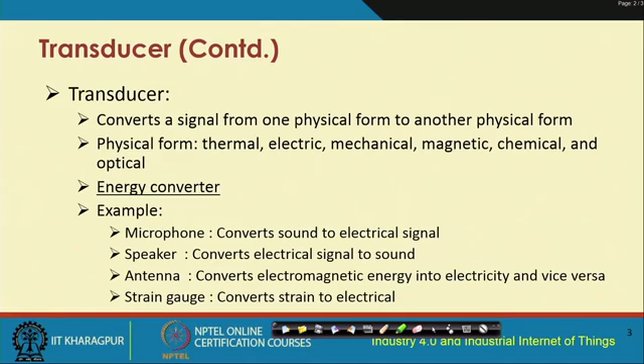For instance, things like the microphone, the traditional microphone. The microphone converts sound signals to electrical signals, which are then amplified further, and through the speakers we are able to hear. So this is the concept of how a microphone works. Microphone is an example, a traditional example, of a transducer.

A speaker is also likewise a converter of energy from electrical form to sound. So a speaker is also another example of the transducer. Similarly, we have antennas which convert electromagnetic energy into electrical energy and vice versa. So antenna is also a transducer, and there are many other examples such as a strain gauge, which is also an example of a transducer.

So let us try to understand sensors as transducers. What is that sensor? Sensor, as this name suggests, senses something. Senses the physical quantity, the physical changes, the physical characteristic of the environment in which it is operating. So a temperature sensor, for example, will sense the changes in the temperature of the environment in which it has been deployed. So this is an example.

It is basically the characteristic of a device or material to detect the presence of a particular physical quantity, and in this example, this physical quantity is temperature. So the changes, to detect the presence, the change in the temperature is what a temperature sensor would do.

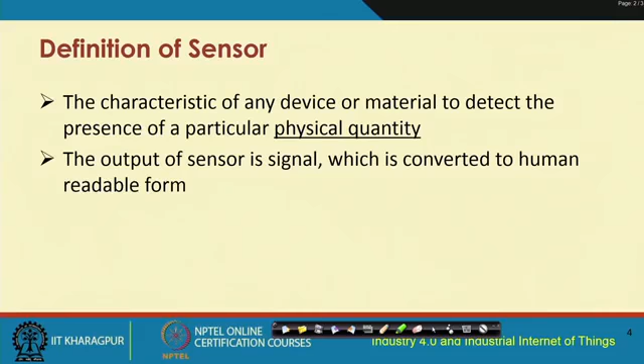So a sensor basically performs the function of input by sensing or feeling the physical changes in the characteristic of a system in response to some stimulus. These stimulus are basically physical parameters, which could be changes in the temperature, changes in the lighting condition, changes in the gas.

A gas sensor, for instance, would sense changes in different gases for which they have been fabricated to sense. So for example, there could be a methane sensor, a carbon dioxide sensor, carbon monoxide sensor, oxygen sensor. These are basically sensors devised to sense the changes in the amounts of these gases in the environment. Gas sensors are very useful to monitor different gases, particularly in our current context of environment monitoring.

Gas sensors are very useful, and they are also very useful for mining environments. For example, methane sensors are used in mines to detect the increase in methane gas in coal mines, and as you know these gases are very dangerous, so it is very important. So IoT in mines, for example, you need to use different gas sensors if it is for a gas monitoring application. So these sensors are very much useful.

Temperature, pressure means atmospheric pressure, atmospheric temperature, or it could be temperature of any particular object. So all these different sensors could be used for this particular purpose.

So then we have that something is sensed and the response is in the form of some changes in the resistive capacities, changes in the capacitive capacities, or changes in current voltage characteristics. So all these characteristics - current, voltage, resistance, capacitance, impedance - come in the form of the output.

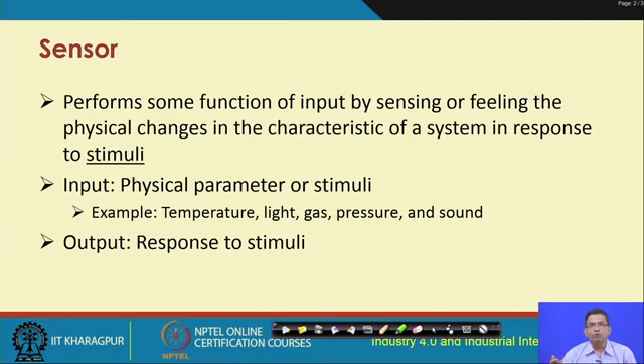Now let me see if I can show you some of these different sensors. So this is a PIR sensor.

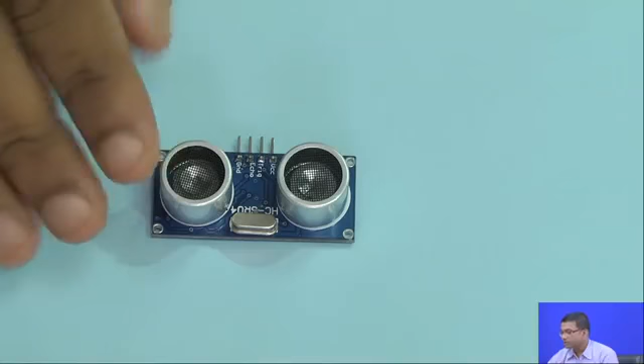And we have this ultrasonic sensor. This ultrasonic sensor can help you detect how far a particular object is, so obstacles can be detected with the help of this sensor. This basically works on the basis of ultrasound, a sound wave sent from one of these two cylinders that you can see over here. One cylinder sends a sound signal, it gets reflected by the obstacle and is detected by the other, and then based on that the sensor works out how far a particular obstacle is, whether there is an obstacle in its range and so on.

Let me show you another sensor of a different type. This is basically the color sensor. It can detect colors, different types of colors.

This is an accelerometer sensor. Then we have the gas sensor, carbon monoxide more specifically. This sensor can detect carbon monoxide gas. Then I have also brought for you another sensor which is the rain gauge, the rainfall sensor, which will detect rainfall.

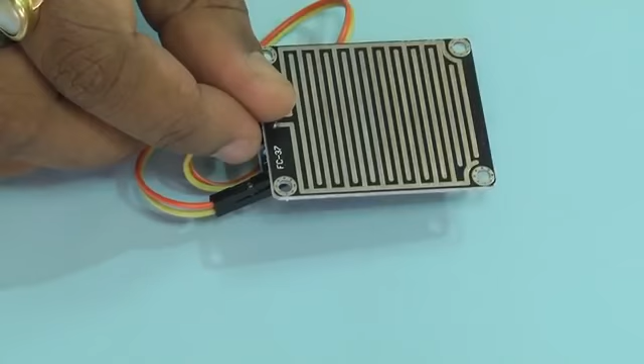So we have different sensors. Now let us go back to our discussion. We have these different types of sensors, and these sensors have their own different ways of operating. But let us try to understand first the characteristics of sensors at a very high level. In general, the characteristics of sensors can be classified into two types: the static characteristics and the dynamic characteristics.

Before that, let me tell you how a particular sensor works. Different sensors have different operating mechanisms, but in general, after a sensor starts its operation, it takes a while, in many cases, to come to something called the steady state. So it will come to a steady state of operation and then it will work in that steady state.

Static characteristics are basically about the characteristics of a particular sensor in the steady state condition. Once the sensor has come to its steady state, how the output of a sensor changes in response to the input change is captured by static characteristics. Dynamic characteristics are about the properties of the system's transient response to an input, before basically the sensor achieves the steady state.

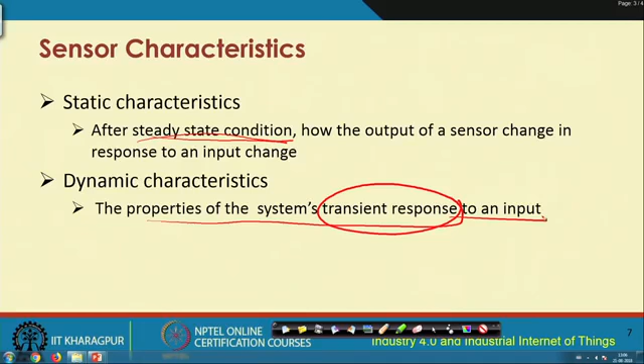These static characteristics could include accuracy, which is about the correctness of the output compared to a superior system, how accurately the sensor measures whatever it is supposed to sense. Then we have another static characteristic, the range, meaning the range of operation, lowest value to highest value. For instance, lowest temperature to highest temperature of a particular temperature sensor is the range of that sensor.

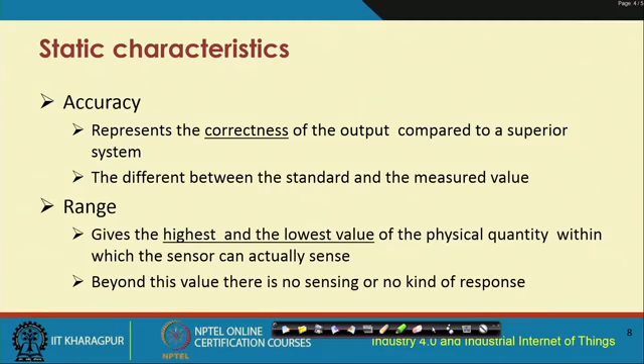Then we have resolution, which is about the smallest change in the input that a sensor is capable of sensing, similar to the resolution of a camera. For a temperature sensor, the smallest change in temperature that it is able to sense or detect is basically the resolution of that sensor.

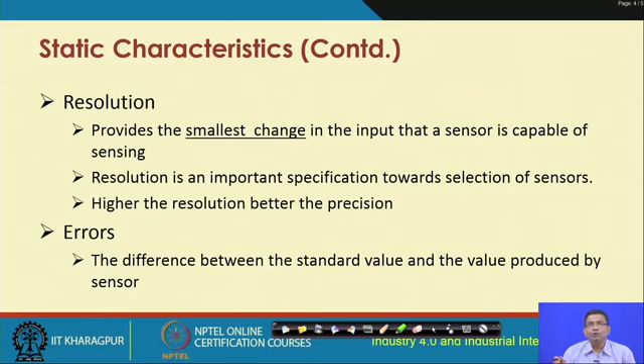Error is basically the difference between the standard value and the value produced by the sensor; that is the error characteristic. Sensitivity indicates the ratio of incremental change in the response of the system with respect to the incremental change in the input parameter. That is basically the sensitivity of a sensor.

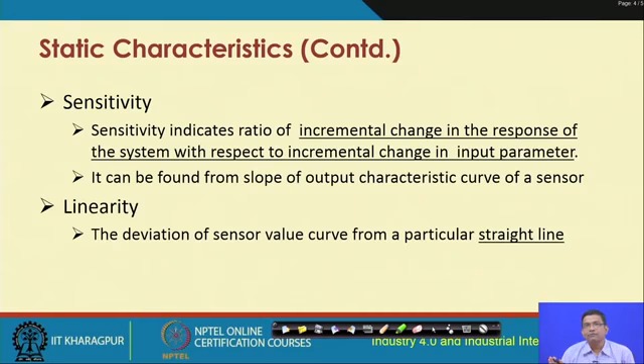Then the linearity characteristic is about the deviation a sensor has in its value from the straight line curve. If you draw the curve of behavior of a particular sensor, the deviation it has from the straight line is the linearity characteristic of that sensor.

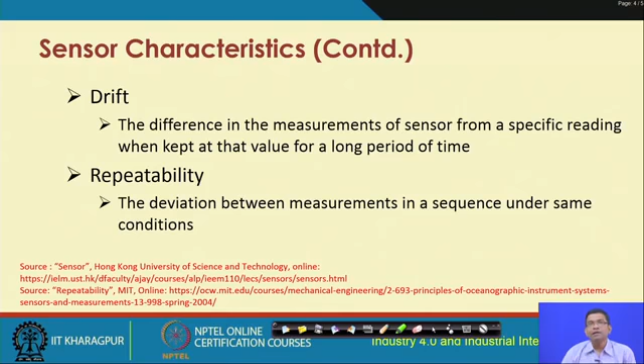Then you have the characteristic like drift. Drift is about keeping a particular sensor for a long duration of time in a particular condition, whether it's a temperature sensor or any other, and the difference in measurements that it shows over that period of time is the drift. Then we have repeatability, which is the deviation from measurements in a sequence under the same conditions, whether the same value can be repeatedly obtained under the same conditions by the same sensor.

Now, those were the static characteristics. Let us come to the dynamic characteristics. Dynamic characteristics are about, if you are changing the inputs, how well the sensor responds to those changes in input. So the transients that are received are captured through the dynamic characteristics.

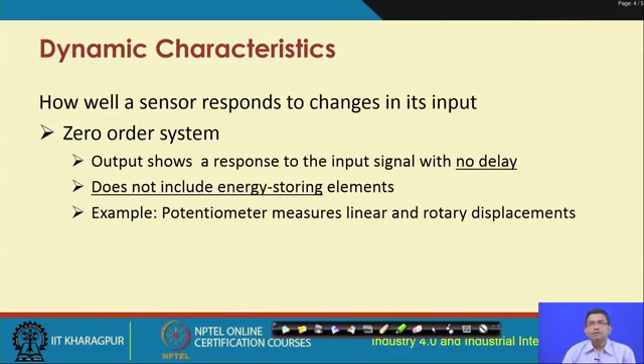You have different things like the zero order system, which is basically a system where the output shows a response to the input signal with no delay. These zero order systems do not include energy storing elements. For instance, a potentiometer, which measures linear and rotary displacements, is an example of a zero order system.

First order systems are when the output approaches its final value gradually. Gradually is very key to this first order system. These systems will have some kind of mechanism for both energy storage and dissipation.

Typically there could be a capacitance, for example a capacitor, which will store this energy and dissipate it over a duration of time in these systems.

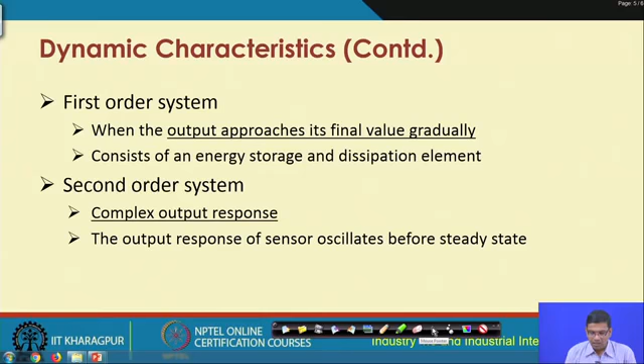Second order systems will have a complex output response, not gradual, and this output response of these sensors will typically oscillate before reaching the steady state. It will be something like this, oscillating between certain values before that steady state is arrived at. These are the second order systems.

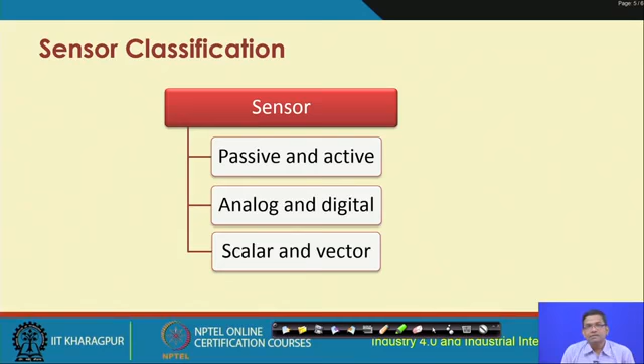Now let us look at how these sensors could be classified. The sensors could be classified in different ways: as either passive sensor or active sensor, analog sensor or digital sensor, scalar sensor or vector sensor. Let us look at what these are.

A passive sensor cannot independently sense the input. Examples of passive sensors are accelerometer, soil moisture, water level, temperature sensor, and so on. Active sensors are the ones which can independently sense the input. For instance, radar as a sensor is an example of an active sensor, along with sounder, altimeter sensors, and so on.

Let us look at another classification, analog versus digital. Analog sensors, as the name suggests, produce output which is some continuous function of the input parameter. Examples would be temperature sensor, light dependent resistor (LDR), analog pressure sensors, analog Hall effect or magnetic sensors, and so on. An LDR shows continuous variation in its resistance as a function of the intensity of light falling on it.

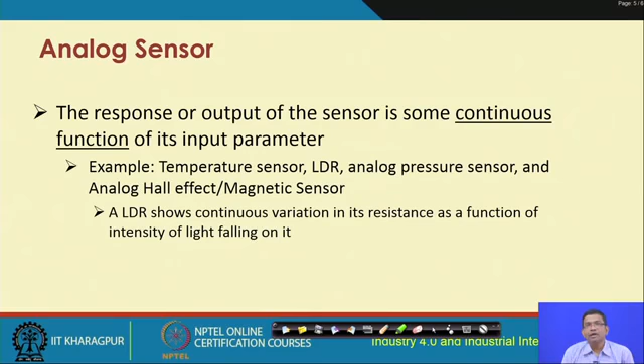Digital sensors are basically the ones where the response is of binary nature, and these have been designed to overcome some of the limitations of analog sensors, which produce a continuous function of the output with respect to the input change characteristics. There is some analog to digital conversion in most of these digital sensors. Examples of digital sensors would be PIR sensor, digital temperature sensor, and so on.

Scalar sensors and vector sensors. Scalar sensors are basically the ones which measure only the magnitude of the input parameter, only the magnitude. It is essentially the difference between scalar values and vector values that shows the difference between scalar sensors and vector sensors. So the response of a sensor is a function of the magnitude of the input parameter only, nothing else, and it is not affected by the direction of the input parameter.

Examples would be temperature sensor, gas sensor, strain sensor, color sensor, smoke sensor. These are all examples of scalar sensors, because the detection of these parameters does not depend on the change in the direction of the input, change in direction of temperature, change in direction of gas, etc. It does not get affected by that, but by the quantity of temperature, quantity of gas present, and so on.

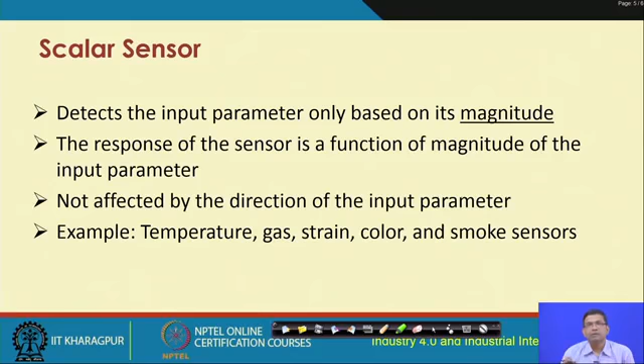Then we have vector sensors, where the response of the sensor depends on the magnitude, the direction, and the orientation, not only the magnitude but also the direction and orientation. Examples would be accelerometer, gyroscope, magnetic field sensors, motion detector sensors, and so on.

Let us look at how an actuator basically works. As you can see in this figure, an actuator takes two inputs: one is the energy, so there has to be some kind of energy supply or source, and some signal. Together these are taken by the actuator to produce some kind of motion, such as force or whatever. So an actuator is a part of the system that deals with the control action required, the mechanical action. This could be mechanical or electromechanical, so we could have mechanical actuators or electromechanical actuators and so on.

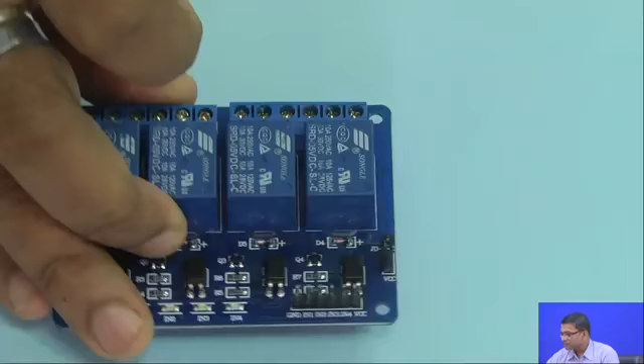Let me now show you some pictures of actuators that I have in my lab. There are many others, but these are some of these pictures of actuators. So this is an actuator.

This is an electric relay. What this relay does is transform electrical energy into some kind of mechanical action, so it could be electromechanical as well. These relays are very useful for taking an electric signal and performing some kind of mechanical operation, such as turning on or off a particular valve, or turning on or off a device such as a compressor, and so on. So this is a relay, which is an actuator.

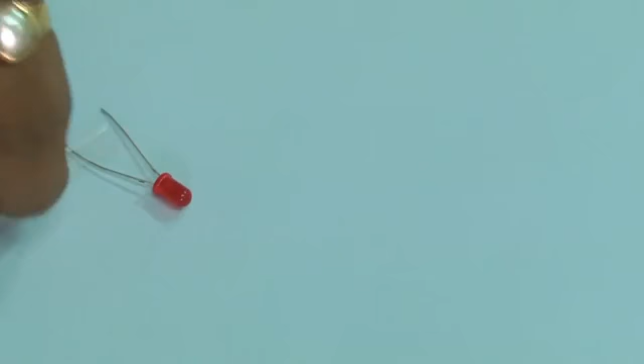You could also have actuators like these, which most of you have already seen - these are LEDs. An LED could be turned on or off in response to something being sensed, let us say a gas being present. So you turn on the LED. That becomes an example of actuation.

These are different examples: electric motors, solenoid valves, hard drives, stepper motor, comb drive. Then you have hydraulic cylinder, piezoelectric actuator, pneumatic actuators. These are different types of actuators, and these actuators can come in different shapes and sizes - these could be micro actuators, macro actuators, and so on, depending on the size.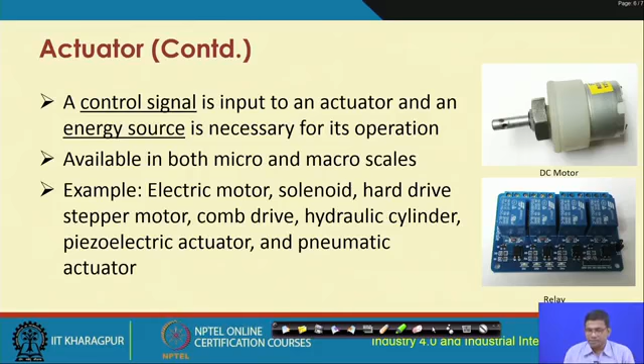So the actuators can be classified into different types, and these are some examples: electric linear, electric rotary, fluid power linear, fluid power rotary, linear chain actuator, manual linear, manual rotary. These are some different types of classifications of actuators. Now let us look at

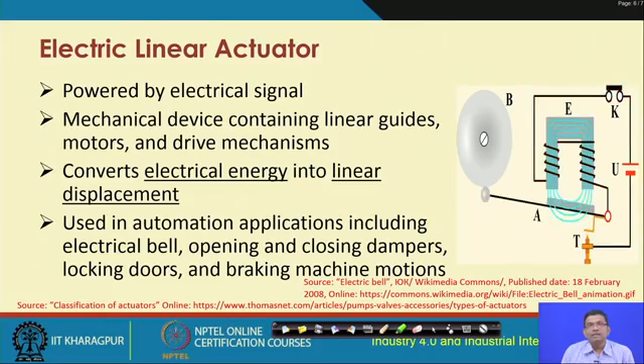this electric linear actuator. As this name suggests, these are powered by electric signal, and that electric energy in these actuators is transformed to achieve some kind of linear displacement, and that is why these are known as electric linear actuators. Examples could be electric bell - this is the picture, the animated one - opening and closing of dampers, locking doors, braking machine motions and so on. These are examples of use of electric linear actuators.

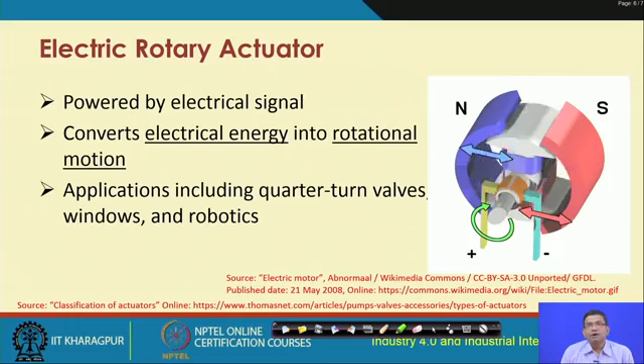Then the next one is electric rotary actuator. An example is what you see in front of you now. These are powered by electrical signals and convert the electrical energy into, as this name suggests, rotational motion. So the previous one was electrical energy into linear displacement, and this one is electrical energy into rotational motion. Quarter turn valves and different other electrical motors are all examples of electric rotary actuators.

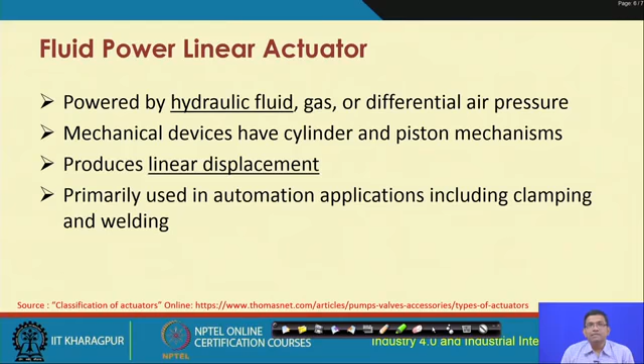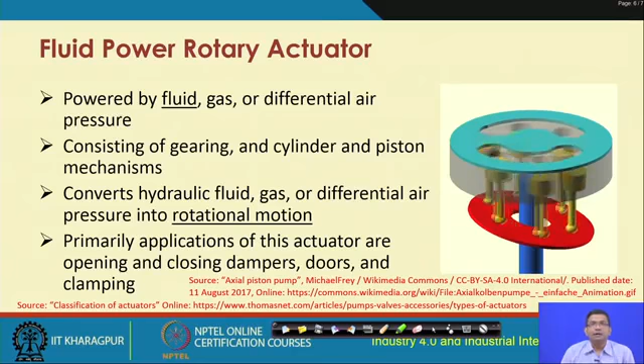Then you have the fluid power linear actuator, and again as this name suggests, these are powered by different fluids, hydraulic fluids, gas or air pressure and so on, and produce linear displacement. Then you have fluid power rotary actuator, again powered by fluid such as gas, liquids and so on, but produces rotational motion, like the picture you see in front of you. Rotational motion is produced as an output of these actuators.

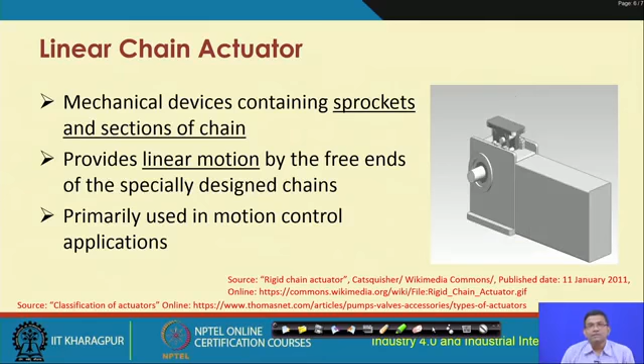Then we have the manual linear actuator, which provides linear displacement through the translation of manually rotated screws or gears. So here it is not automatic, it is manual - manual rotation is performed on some screws or whatever, and consequently there is some linear displacement. These could be found in gearboxes, hand operated knobs, wheels, etc., and these are primarily used for manipulating tools and workpieces.

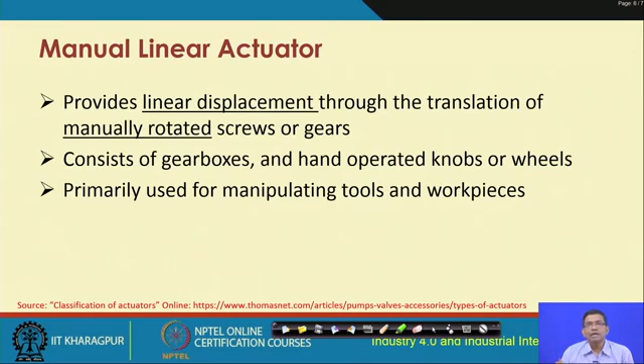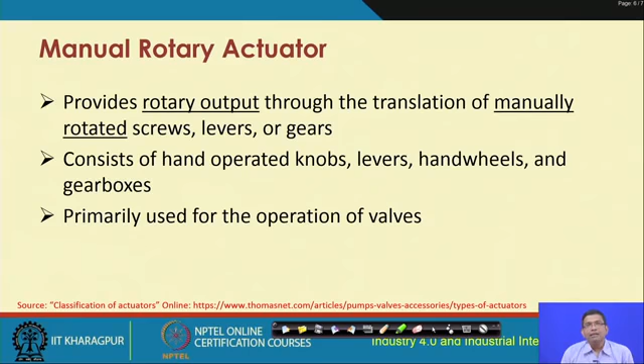Then you have the manual rotary actuators, which provide rotary output through the translation of manually rotated screws, levers or gears, and these are primarily used for the operation of valves.

With this we come to an end of this lecture on sensors and actuators, and as I told you at the outset, sensors and actuators are basically key to the building of IoT and IIoT based systems. Throughout this course we will be talking about the use of sensors and actuators, and this preliminary understanding about each of these is necessary for you to have an in-depth understanding about how IIoT works. These are some of the references in front of you - there are many more, but I think these will be sufficient for you to have the basic understanding to go forward and understand the other lectures in this course. Thank you.